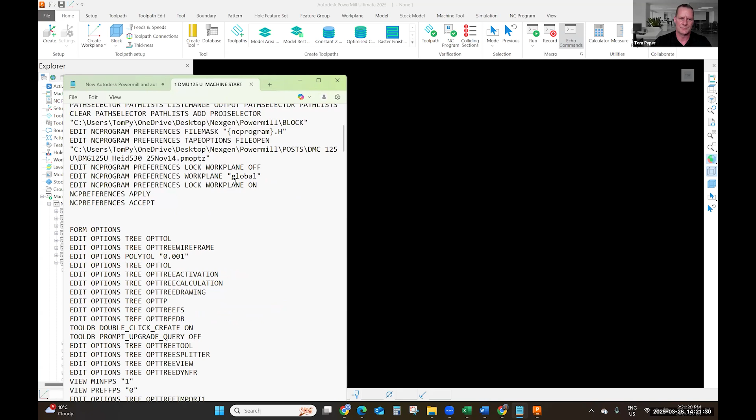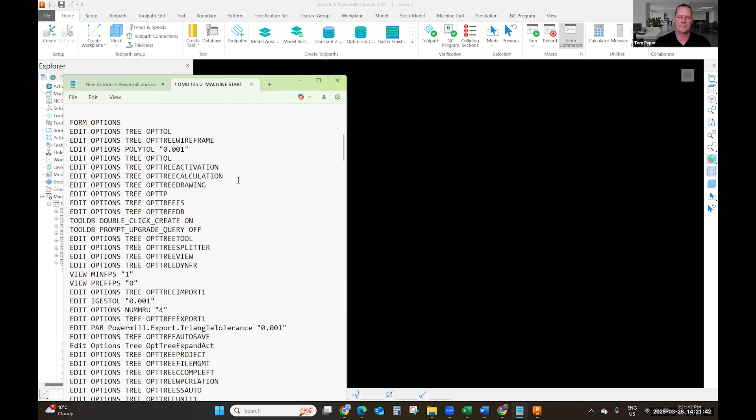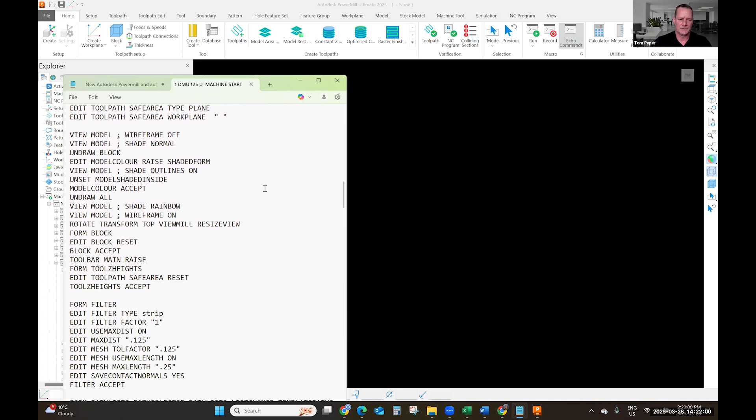So this is just going to set all the tolerances within PowerMill. I think a lot of times when people are concerned about calculation speed, they're just leaving it at a very high tolerance. It may not need to be such a high accurate tolerance within PowerMill itself. So a lot of these things here are directly related to the accuracy. So we're opening things up where we can, and still achieving the accurate machined part. And then of course, we're loading up all of those components that I specified earlier. And I'm just going to go ahead and run that for you guys.

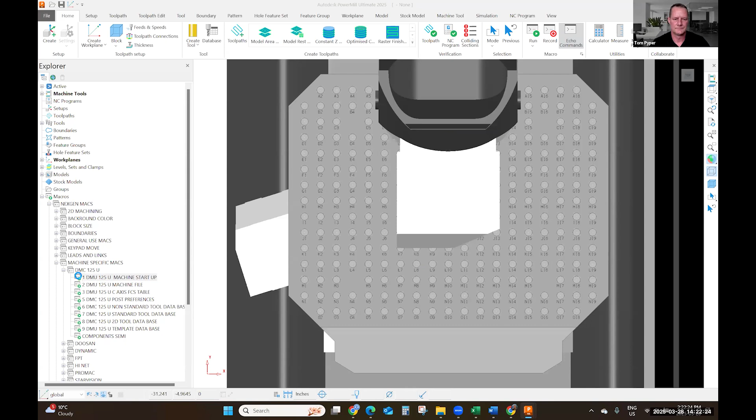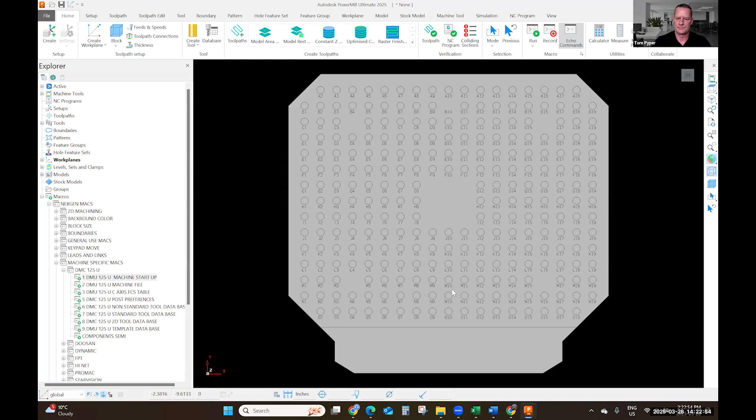So you're seeing it load surface defaults, as I'd mentioned earlier. And when you see those colors flashing, essentially it's taking the surface defaults and adding 1/8 of an inch of safety surface to the table. So during program calculation, if you're turned in on 90 degrees, your spindle is going to automatically avoid the table, greatly reducing the chance of any collisions.

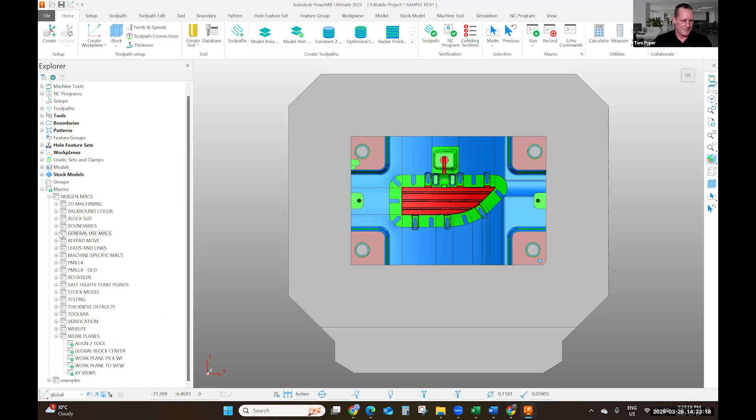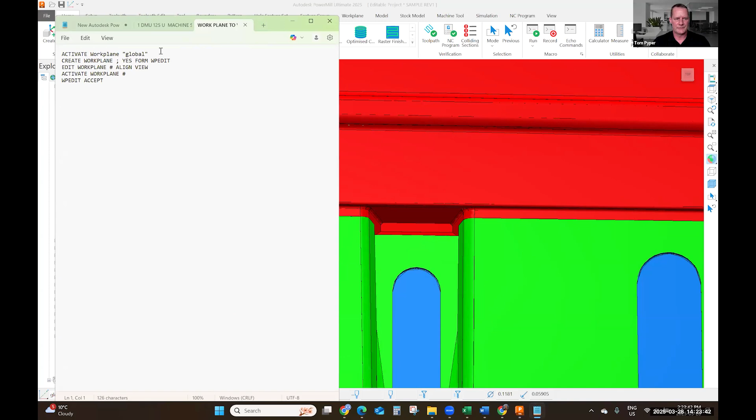So there's that. Now I'm going to show you another model I've got set up here. And just as another example, let's just say we want to get down in this little tab here. And we got a 5-axis machine, so obviously we're going to tip to get away from that wall. So we're going to find a nice sweet spot here like that. And we're going to run this macro here. It's a very simple macro, but again, it does a few functions all in one. And we're just going to say work plane to view.

And we're going to open up our standard templates here. So again, naming structure, file convention, all these things are very important. Everyone on every machine is going to have specific folders and templates specific to their machine. Every machine cuts different. You got 3-axis, you got 5-axis, you got boxways, you got linear guideways. So every program in here is specific to that machine.

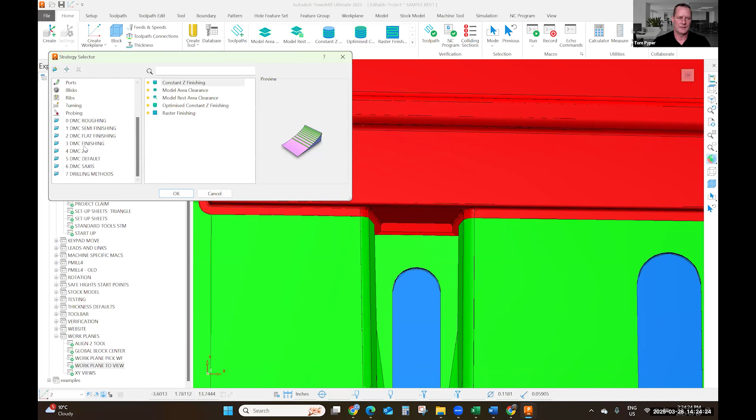In this case, we're going to pull up a Z-level finish program. And again, there's no reason that you should be filling out every blank every time you're pulling up a program. These should be set as a default. Every user should be using the same feed speeds, step over, step downs. Once that happens, and it's set like I said per machine, you're going to see your tooling life go up because you don't have different operators doing things different ways.

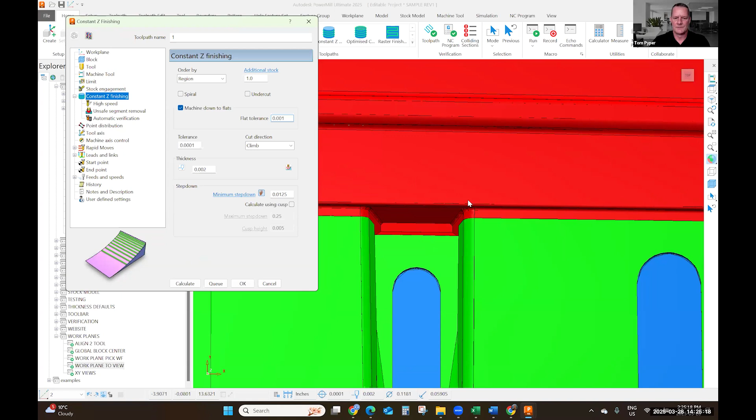Sometimes the RPMs and the step downs can obviously drastically reduce tool life. So once you collectively decide what those feed speed step downs should be, put them in here, save them off. Everybody's doing it the same way. So we've got this open. We've got our work plane made. Now we're going to go up to a boundary creation.

Now, again, this might seem simple, but rest boundary creation, for example, let's say we want to make a rest boundary for a 3mm ball. I'm just going to show you this here. What's really, really important here is the standards. Okay, so we've got these standards in here. The tolerance is set. Detecting the thickness of the stock, extending the boundary, all these things, when they're not done the same way every time, you're going to get a different result, obviously.

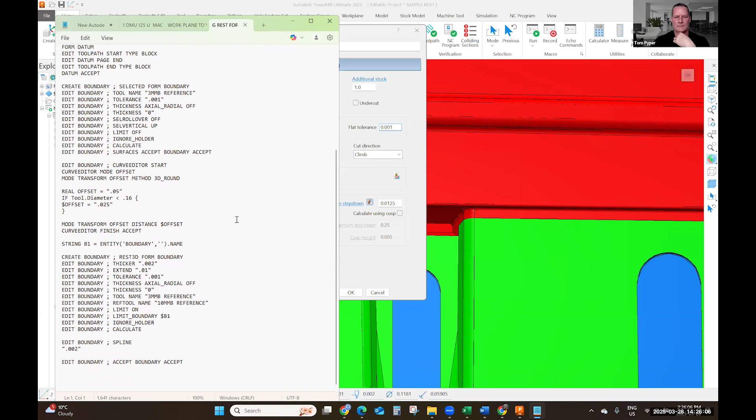So I'm going to run that. Sorry, before I do that, jumping ahead of myself here. We're just going to go ahead and select only the surfaces that we're interested in machining here, and everything else we're not interested in right now. So once you've selected those surfaces, you can simply run this. That's going to set the block form. That's going to create a rest boundary, a limiting boundary, I should say. And there we will have our boundary just like that.

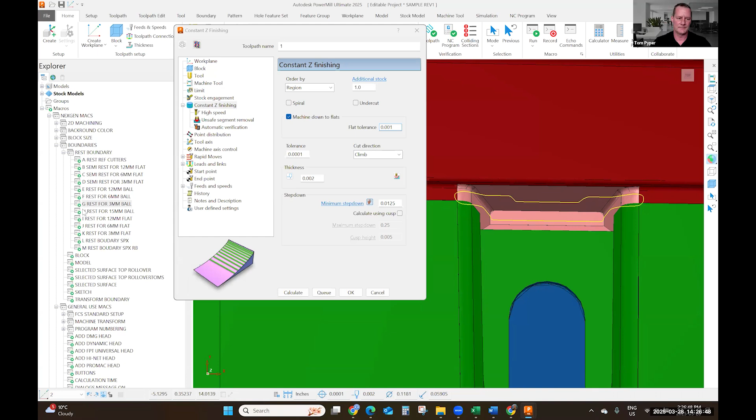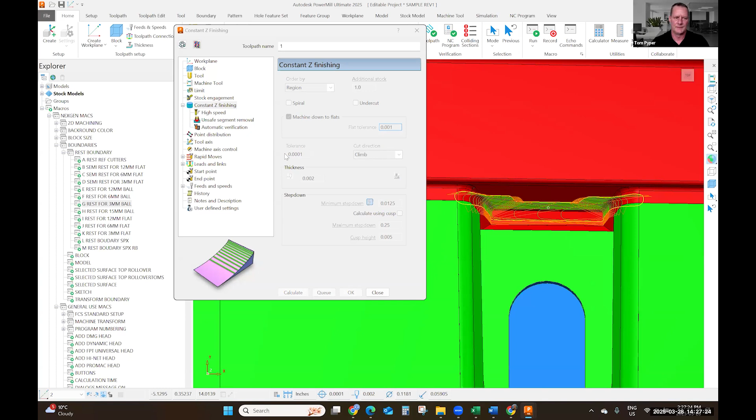Now, again, instead of going into the boundary creator and filling in all of these blanks, this is now a standard. It's done. Everybody does it the same. The speed in which you can do it, the consistency, it's all going to show at the end result, and the quality. And again, you're just hitting a few buttons instead of filling everything in. There's just a couple of examples. Obviously, there's a lot more things that you can do. I just wanted to briefly give you a quick rundown of scratching the surface of the possibilities here.

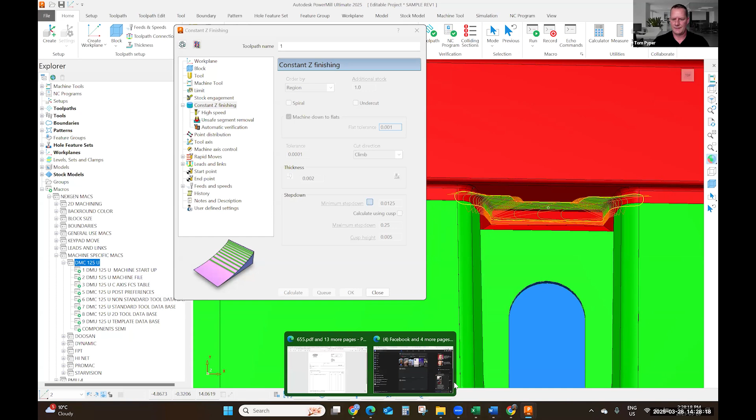So again, we can go to machine specific. As I'd mentioned, all the machines in this particular example are here. They've all got the same things. So even if you open an old session that was done on another machine, you can simply run these macros here. It's going to set your tool database, your post output, your template database. So in a very short amount of time, you will be ready to take that job, maybe after stress relief or after welding or after different applications, when the job has to come back for rework or more work. You can quickly get moving again. So that pretty much wraps it up for me.

Sorry, oops. Chase. Yeah, awesome. I'm glad we were able to get a demo in there as well. It's always cool to see. Brief, just yeah, brief.

Yeah. The next time we'll dive a little more into some examples, and I really just wanted to explain to everybody or showcase that it's not just about PowerMill. It has to be about the full operation and other things that complement PowerMill and the guy running PowerMill.